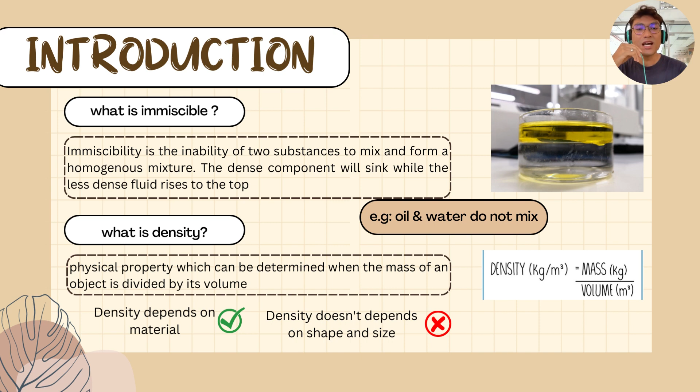What is immiscibility? Immiscibility is an inability of the two substances to mix and form a homogeneous mixture where the dense component will sink while the less dense fluid rises to the top. However, density is a kind of physical property which can be determined when the mass of an object is divided by its volume. However, regardless of the shape and size, density will always rely on the material itself.

Immiscible liquid separation is widely used in the application of water treatment, petroleum refinery, food manufacturing, and medical field. However, there are some drawbacks, which is it is difficult to efficiently separate two immiscible liquids due to its different densities, and existence of impurities such as particles or other liquids can interrupt the separation process.

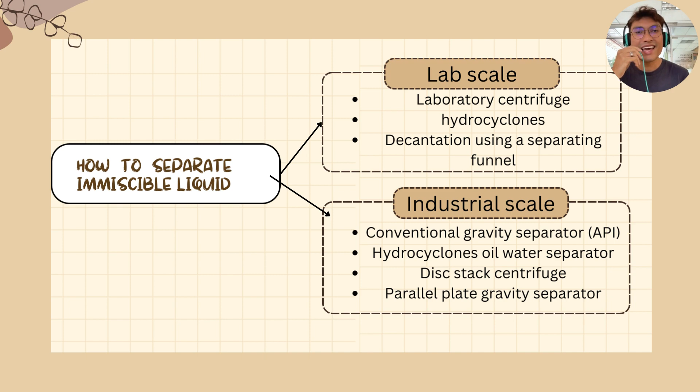The separation of immiscible liquid can be done in two ways, namely lab scale and industrial scale. As for the lab scale, the commonly used equipment is laboratory centrifuge, hydrocyclones, and decantation using a separating funnel. However, in industrial scale, the commonly used equipment is conventional gravity separator, hydrocyclones oil water separator, and disc stack centrifuge.

As for centrifugal separation, it is a process that utilizes centrifugal force for separating immiscible liquids in a mixture. The mixture's denser component moves further from the axis while its lighter component moves closer towards the axis. As for the working principle, it operates based on their density under the influence of gravitational force, and there are two types of operational modes, namely sedimentation principle and filtration principle.

There are two types of centrifuge used in the lab, which are tubular bowl centrifuge and disc centrifuge. As for the tubular bowl centrifuge, it has the capability of handling low solid concentration and has a small capacity. And the direct access to the bowl is possible with the underdriven batch machine, whereas the bowl is suspended from above for the overdriven batch centrifuge.

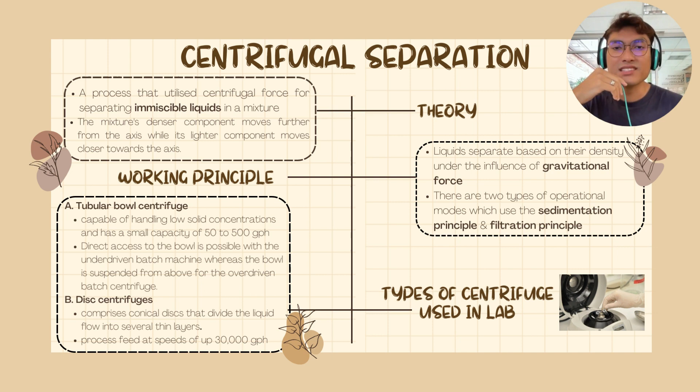As for the disc centrifuge, it comprises of conical discs that divide the liquid flow into several thin layers, and it processes feed at speeds of up to 30,000 gallons per hour.

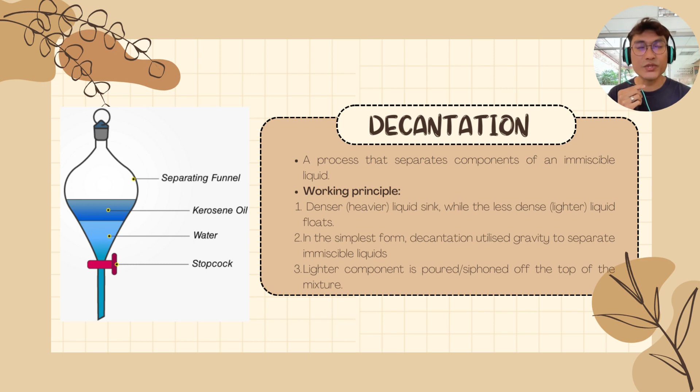Moving on to decantation. Decantation is a process that separates components of an immiscible liquid. As for the working principle, the heavier liquid, which is the denser liquid, will sink, whereas the less dense or the lighter liquid will float. In the simplest form, decantation utilizes gravity to separate immiscible liquids, where the lighter component is poured or siphoned off the top of the mixture.

A horizontal gravity decanter is more preferable compared to vertical design due to its maximized ratio of phase border between the two settled layers. However, the vertical decanters are better suited in low flow rate applications and space restrictions. However, it depends on the situation itself.

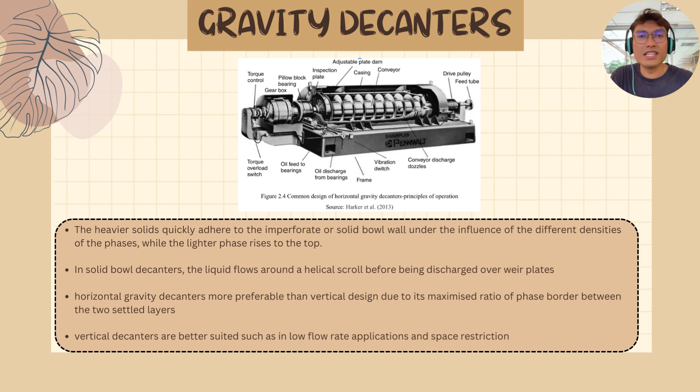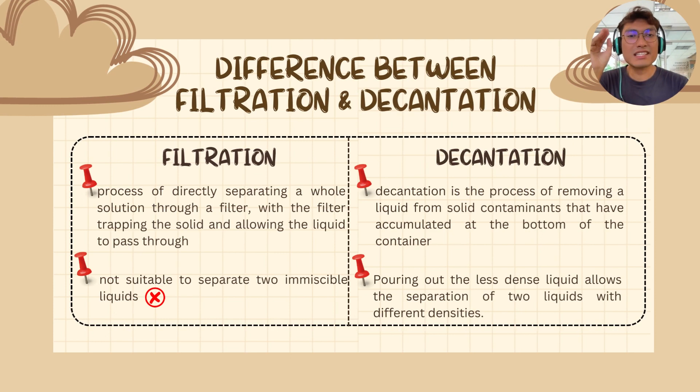Sometimes people might get confused between filtration and decantation because they might look the same. However, in fact, they are different in terms of their operation. This is the difference between filtration and decantation. Filtration itself is a process of directly separating a whole solution through a filter, with the filter trapping the solid and allowing the liquid to pass through. So, it is not suitable to separate two immiscible liquids because the liquid still can pass through the filter.

However, decantation is the process of removing a liquid from solid contaminants that have accumulated at the bottom of the container. So, pouring out the less dense liquid allows the separation of two liquids with different densities.

Just now, we've been learning about centrifugation and decantation, but what is the difference between both of them? First, centrifugation uses centrifugal force to separate mixtures, whereas decantation utilizes gravity to separate mixtures. For centrifugation, the centrifuge will spin at incredibly high speeds, where it will force heavier components to sink to the bottom and lighter components to rise to the top.

Compared to decantation, the mixture is allowed to remain undisturbed for a period of time, which allows the heavier component to sink to the bottom. Finally, centrifugation is expensive but very efficient to separate immiscible liquids. Compared to that, decantation is more cost-effective, which is cheaper compared to centrifugation, but it is less efficient compared to centrifugation.

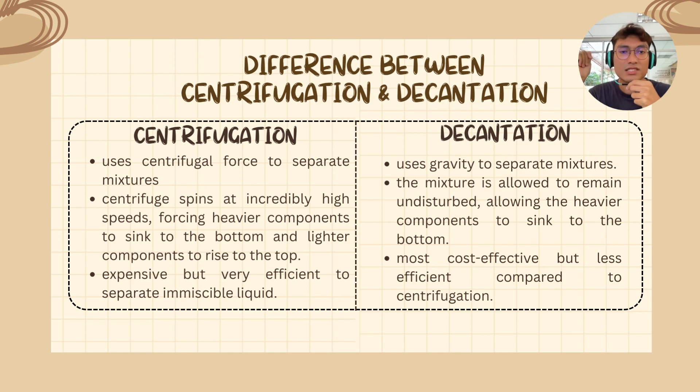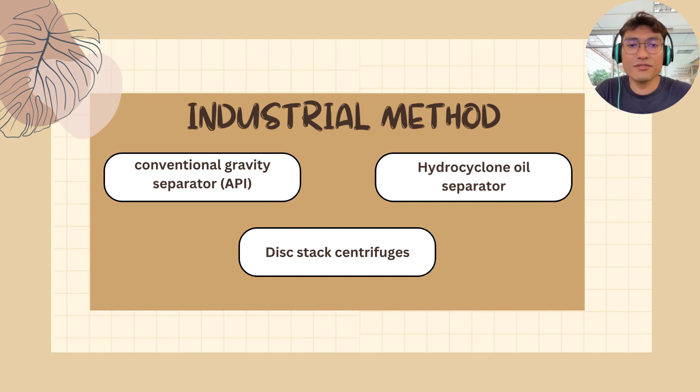Moving on to the industrial method, there are separators that are commonly used in industry, which are the conventional gravity separator (API), the hydrocyclone oil separator, and the disc stack centrifuge. Moving on to the conventional gravity separator, which is commonly used in the petroleum industry, or to be exact, in the petroleum refinery. As for the working principle and application, this equipment is used to separate most of the oil, such as emulsified oil, fuel oil, and dissolved oil, from the effluent of a refinery.

The discrete oil globules will rise to the surface of the water due to the buoyant force, which will form an oil layer, and it operates based on Stokes' law, separating oil and water droplets based on their terminal velocities. A water droplet's terminal velocity is lower; as a result, it takes a longer time reaching the bottom. And how can we increase the separation efficiency? First, the greater the difference in densities, the more efficient the separation will be. Second, the larger the oil droplets, the faster they will separate from the water. And finally, the taller the separator, the more time the oil and water have to separate.

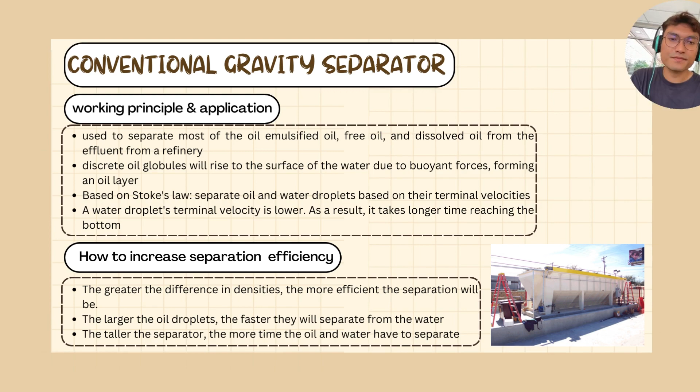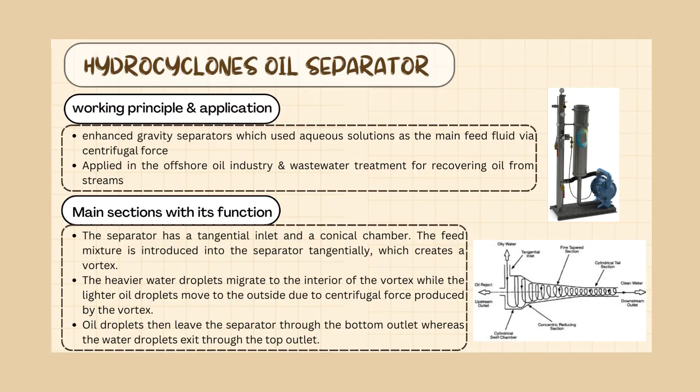First, the separator has a tangential inlet and a conical chamber. The feed mixture is introduced into the separator tangentially, which creates a vortex or eddies. The heavier water droplets migrate to the interior of the vortex, whereas the lighter oil droplets move to the outside due to the centrifugal force produced by the vortex. Oil droplets then leave the separator through the bottom outlet, whereas the water droplets will exit through the top outlet.

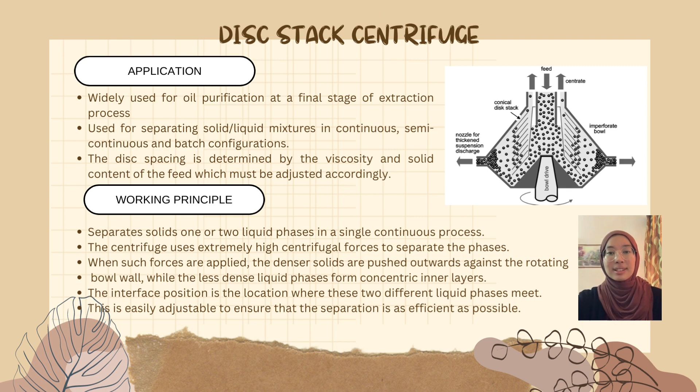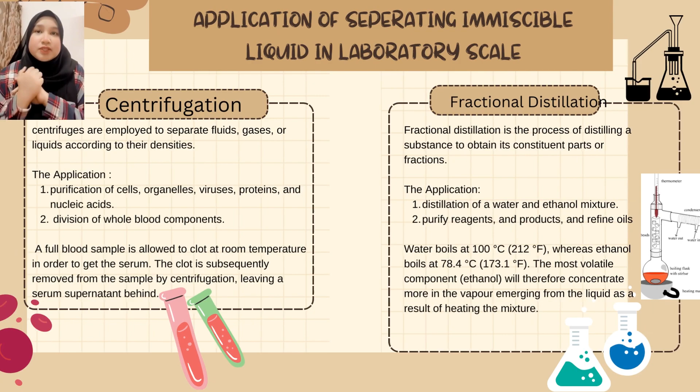Firstly, centrifugation. Centrifuges are employed to separate fluids, gases or liquids according to their densities. For the application, there are two applications that use a centrifuge, which are purification of cells, organelles, viruses, proteins and also nucleic acids, and also division of whole blood components. The full blood sample is allowed to clot at room temperature in order to get serum. The clot is subsequently removed from the sample by centrifugation.

The next application is using fractional distillation, which is the process of distilling a substance to obtain its constituent parts or fractions. The applications of fractional distillation are to distill a water and ethanol mixture, purify reagents and products, and refine oil.

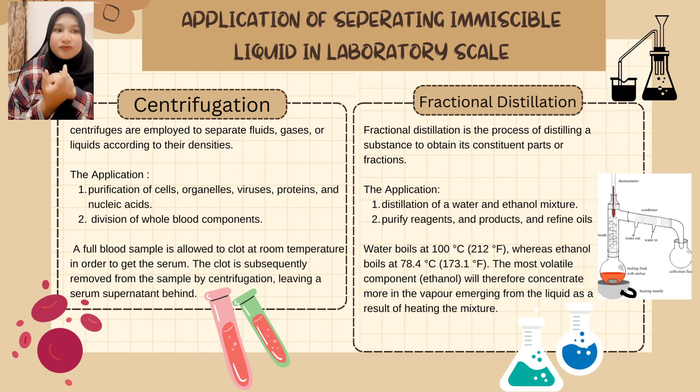Water boils at 100 degrees Celsius, whereas ethanol boils at 78.4 degrees Celsius. The most volatile component, which is ethanol, will therefore concentrate more in the vapor emerging from the liquid as the result of heating the mixture.

Let's move to the next application that uses decantation. Decantation is a term used to describe the process of removing solid contaminants from a liquid solution. However, in order to separate two immiscible liquids of different density or remove insoluble solid particles from a liquid, decantation can also be used. So an application of decantation is cleaning murky water.

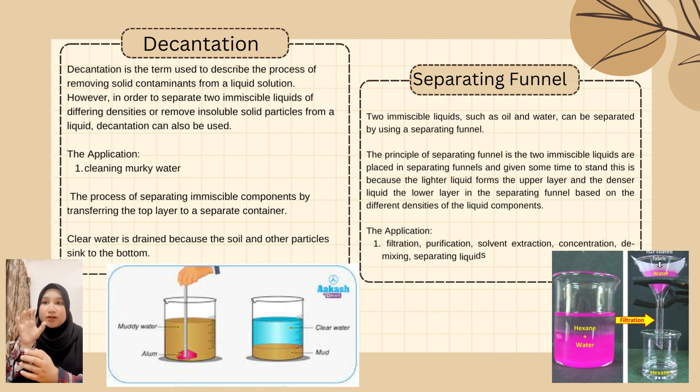As you know, the process separates immiscible components by transferring the top layer to a separate container, where clear water is drained because the soil and other particles sink to the bottom. Lastly, the application in laboratory scale is using a separating funnel, where two immiscible liquids such as oil and water can be separated.

The principle of the separating funnel is that two immiscible liquids are placed in the separating funnel and given some time to stand, with the lighter liquid in the upper layer and the denser liquid in the lower layer based on their different densities. This application is capable of filtration, purification, solvent extraction, concentration, demixing, separating liquids and distillation. It can also be used in hexane and water separation.

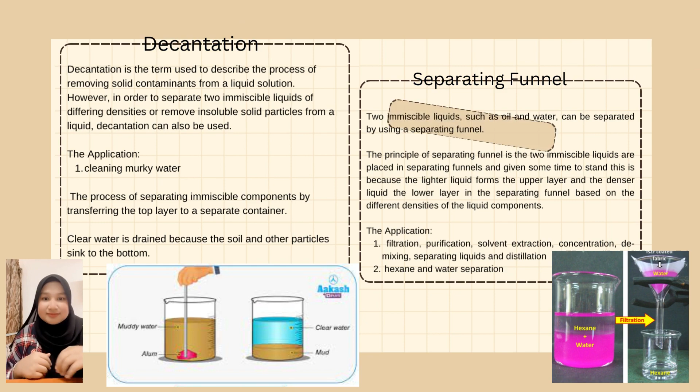Okay, now let's move to the application of separating immiscible liquids in industry scale. Firstly, gravity separation. Levigation and hydraulic washing are terms of gravity separation, in which a water stream is used to separate the lighter gangue particles from the heavier ore particles. The application is pollutant removal in stormwater treatment systems. Removal occurs downward for solids denser than water, like sediments, and upward for solids lighter than water, such as dispersed droplets of petroleum, oil and paper.

For the next application, we use fractional distillation, which is utilized in petrochemical and chemical plants, natural gas processing facilities, and cryogenic air separation facilities. This application of fractional distillation is in oil refineries, to separate crude oil into useful substances. The product with the lowest boiling point will depart from the top of the column, while the product with the greatest boiling point will exit at the bottom.

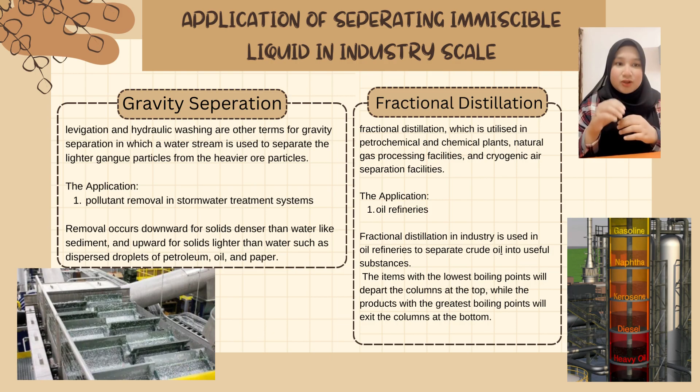Next, we have liquid extraction. In this method, chemicals are separated by two immiscible liquid solutions, typically one aqueous and one organic. Liquid extraction has many applications in industry. Firstly, in the agriculture sector, to find disease-resistant genes in crops, increasing agricultural production, lowering crop loss risk, and also maximizing future livestock and food harvests.

The second application is in the pharmaceutical sector, to isolate and identify proteins, antibiotics, amino acids, and enzymes. Lastly, in the manufacturing sector, to extract essential oils to make fragrances, flavors, and medication. Lastly, from me is chromatography.

Liquid-liquid chromatography is an effective separation technique that has been successfully used for separating and analyzing a wide range of samples: water soluble, oil soluble, ionic and non-ionic compounds, as well as biopolymers like nucleic acids and proteins. There are 3 applications of chromatography. In the pharmaceutical industry, to analyze drug products, separate their various ingredients, and check drug traces inside the patient.

Also in food analysis, for testing undesired ingredients in food products. In the petrochemical industry, it is used for plastics, solvents, fertilizers, paint products, and insulating materials.

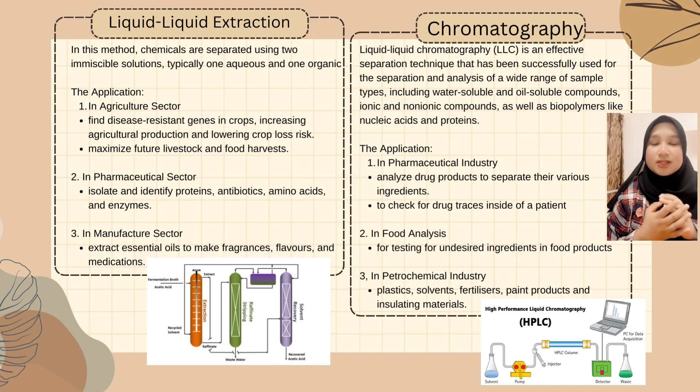Next, we move to the conclusion. To conclude, immiscibility is the property of two substances that prevents them from combining to form a homogeneous mixture. The components of an immiscible mixture will separate, where the less dense component rises to the top while the more dense component sinks. For example, oil and water are immiscible liquids, as they are not soluble in each other. Oil will float on the water because it is less dense than water.

Liquid extraction is one example of this mixing. It is a process that involves successive mixing and settling stages. The two liquids are combined with a solvent that selectively dissolves one of the mixture's components. Centrifugation, separating funnels, decantation, and filtration are example techniques used at lab scale. Meanwhile, hydrocyclone water oil separators, conventional gravity separators, and centrifuges are used at industrial scale.